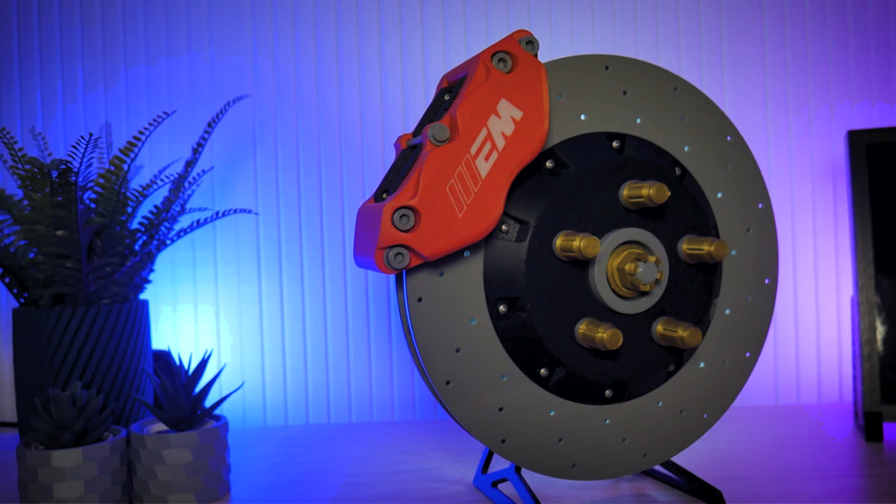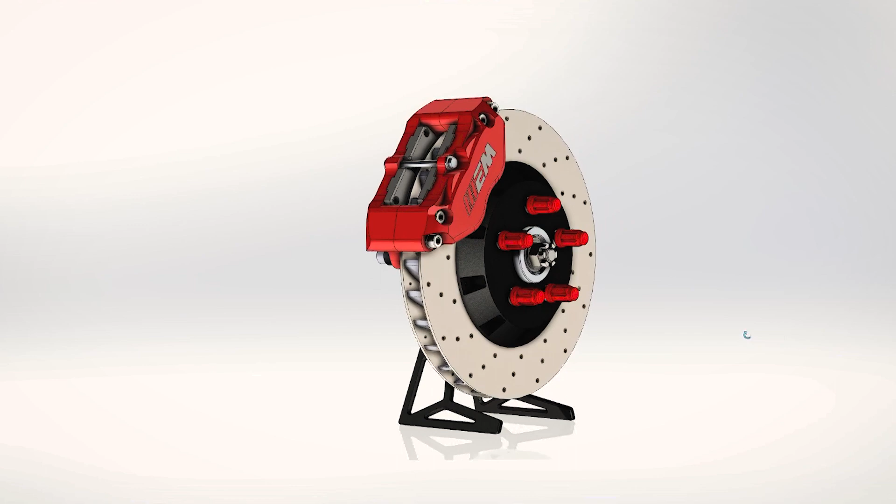In my recent review video of the Anycubic Kobra S1, I featured this 1:1 scale model of a car brake rotor, caliper, and bearing hub assembly. Some people showed interest in getting the files and building one themselves, so I wanted to make this video to explain each of the parts and how everything goes together, plus the few non-3D printed parts you'll need, and optionally 2 pieces you could laser cut instead of 3D print. So let's get into it.

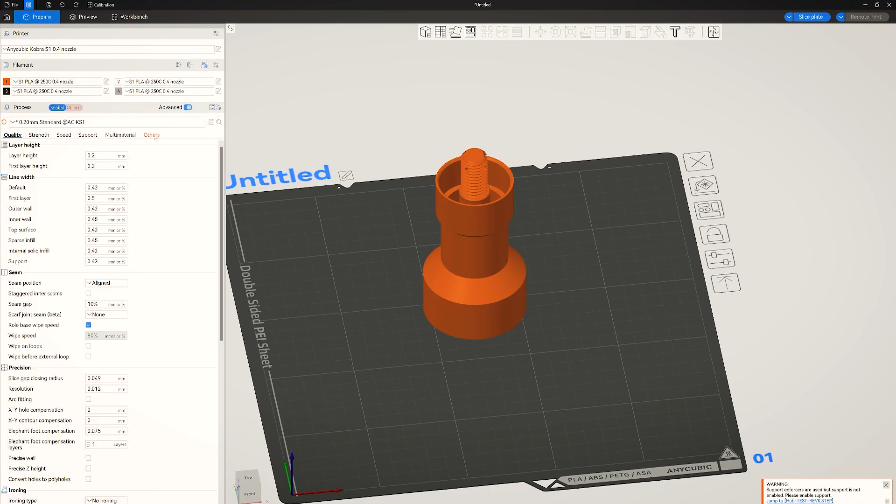This model features actual wheel bearings from a real car. In the 3D printing file list, I'm going to include 2 parts: one is a tube or sleeve that represents the inner housing of the wheel hub bearing carrier, and the other is a spindle test piece. You may need to print these first out of all the other parts because of how these 2 will fit together with the bearings.

As most of us know by now, all 3D printers do not print exactly the same. Tolerances have gotten better over the years, but your printer may still print slightly big or slightly small, and we need these bearings to fit properly.

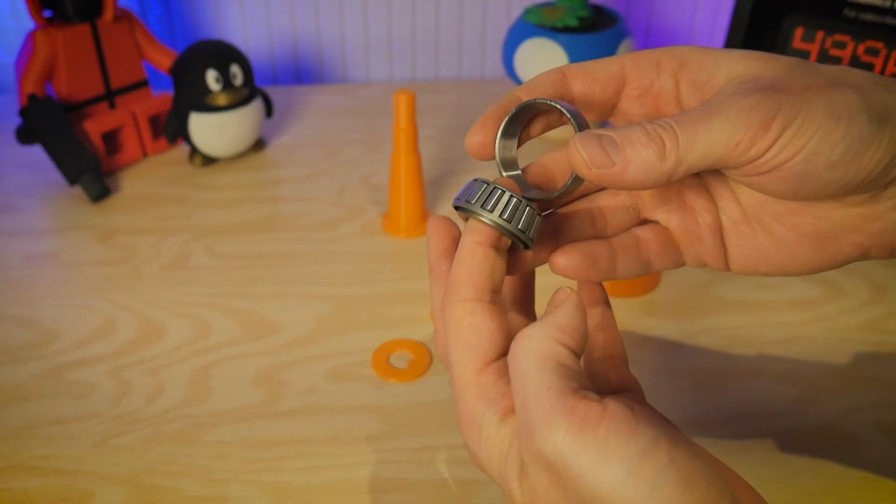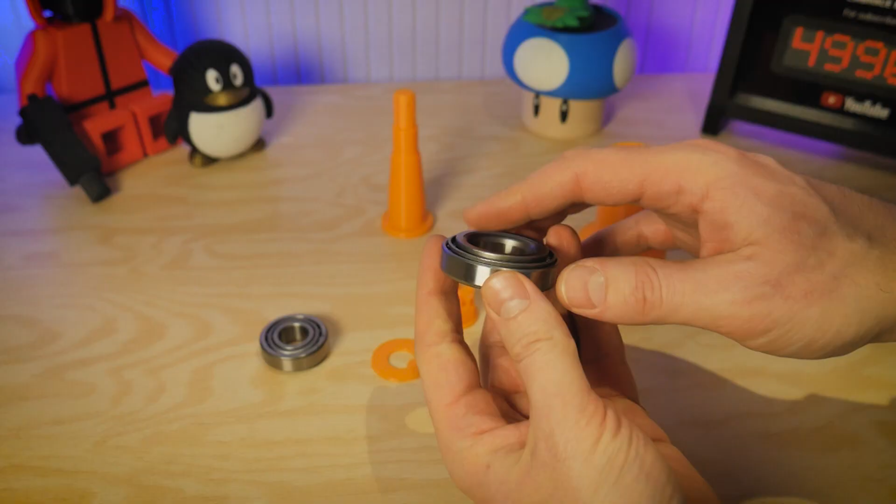The tapered roller bearings feature an inner cone and an outer cup. The larger bearing is the inner wheel bearing, and the smaller bearing is the outer wheel bearing. Both of these will fit into the wheel hub, and for now it's going to be this little test piece here, which represents the inside of the actual hub.

The inner wheel bearing will fit in from the back side of the wheel hub, the larger side, like this. First you'll slip the cup inside, then slip the cone inside. The cup should be a light press fit inside—you don't want a sloppy fit.

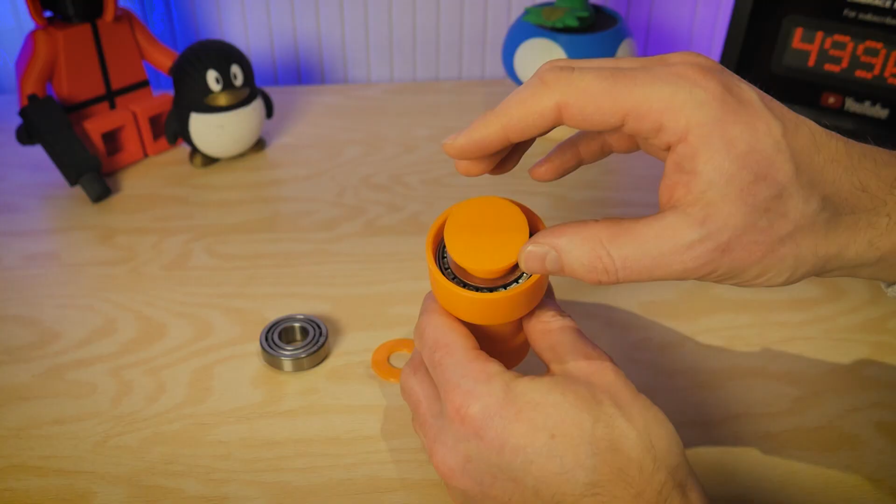Ideally, you want it to press in lightly. Then you can slide the spindle in, and it should also press in lightly as well. Again, you don't want a sloppy fit here, and you shouldn't have to ram it in too hard.

Then we can flip over to the other side, and this is going to be the outer wheel bearing. In the same way, we'll press the cup in first, then place the cone over the spindle that's sticking out, and press it into the cup.

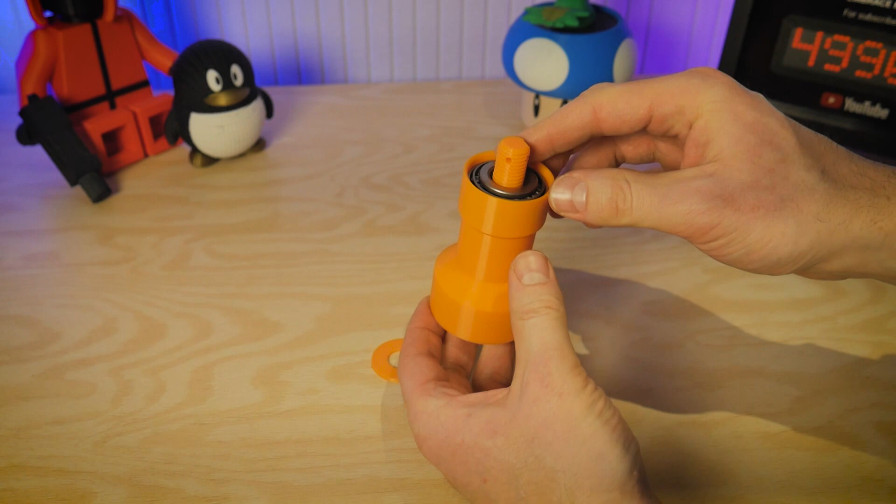After that, we can place our flat spindle washer on top, and then our M16 castle nut. You only need to finger tighten the castle nut, as anything more than that and you'll begin to add bearing preload, essentially forcing the cone into the cup. At some point, too much preload will prevent the bearings from spinning at all.

If you're not getting a good bearing fit, you may have to consider scaling these pieces slightly, but the idea is you're printing test pieces before committing to printing the large pieces.

I already confirmed the fit of all the 3D printed threads in this project on both the Anycubic Kobra S1 as well as several other Creality machines. But similar to the pieces that hold the bearings, you may want to consider printing a couple of the threaded pieces on their own to make sure your printer is capable of printing the threads properly.

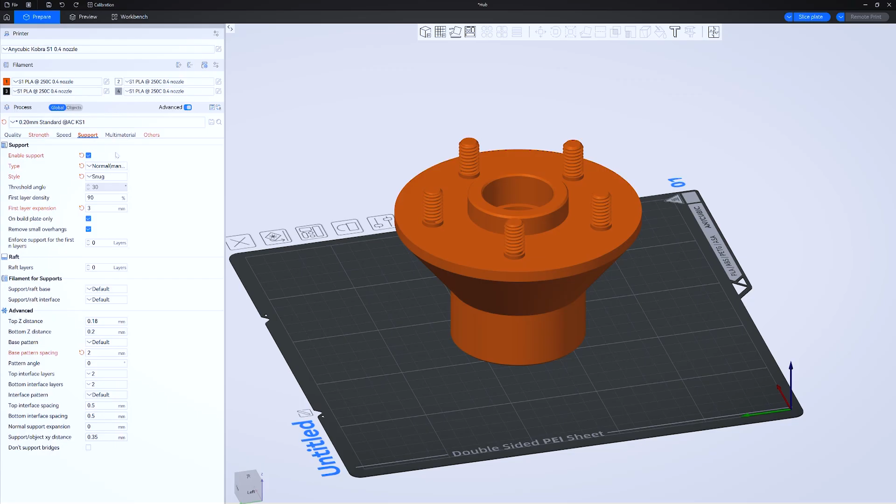One of the larger pieces of this build is the wheel bearing hub, and it's going to be printed in this orientation here. This part will carry most of the weight of the rotor assembly, so you may want to consider printing it with at least 3 walls.

The other detail that should be present if you download my 3MF files is that underneath the hub there is one surface that does need to be supported, which I've already painted on. This is the shoulder that the inner wheel bearing will interface with, so this surface needs to be nice and flat.

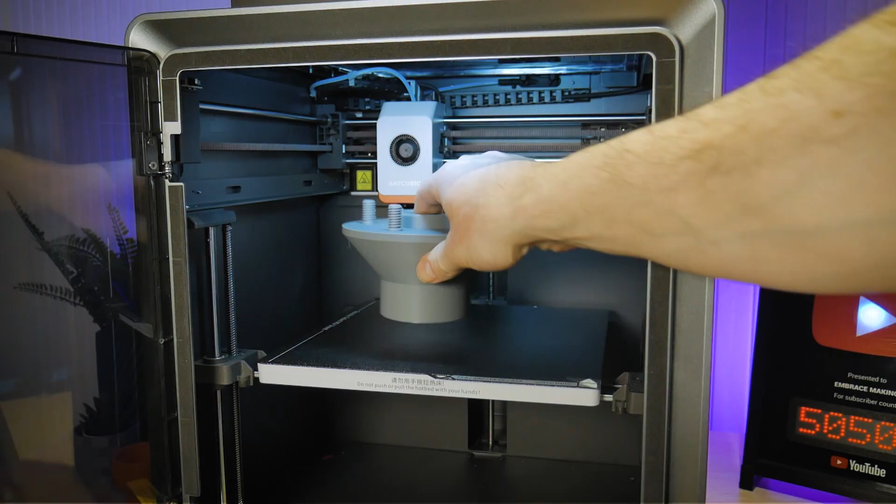You can also see at the top of the part I've integrated 5 M12 threads, and these will also need a little bit of strength. So you may want to add a height range modifier to your part and increase the infill density towards the top around those threads.

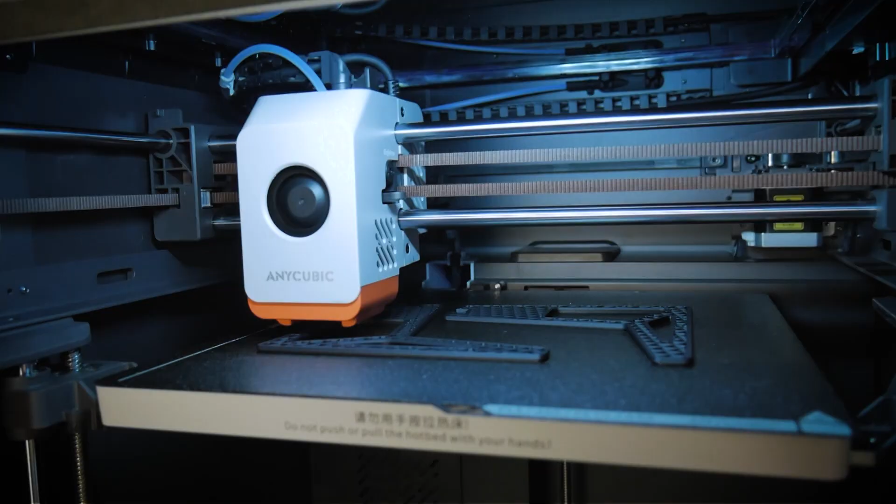At the bottom of the model we have these black legs, and they're basically just stand legs for the entire assembly. They're very easy prints and will just lay flat on your print bed. The only thing here is that they're supporting the weight of the whole assembly, so I printed these with 4 walls and about 25% infill density.

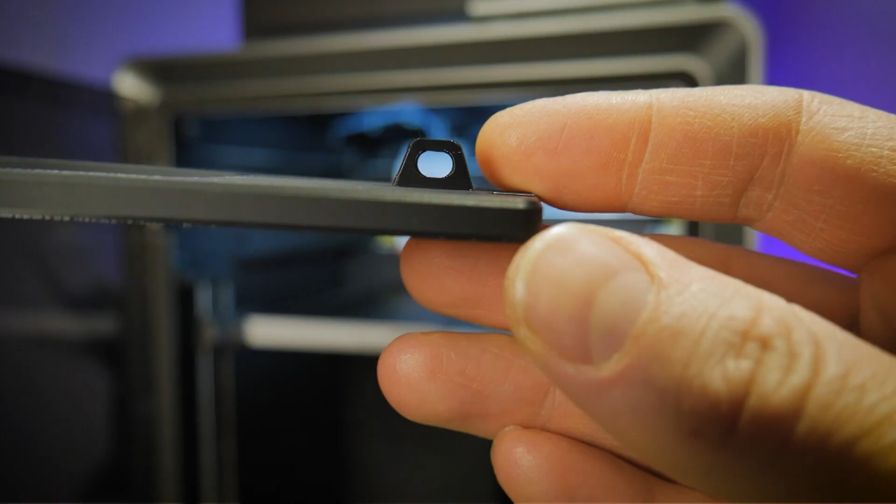Otherwise there's no special requirements here, and the pieces are marked left and right. The left side will be the one on your left hand side when facing the model from the front.

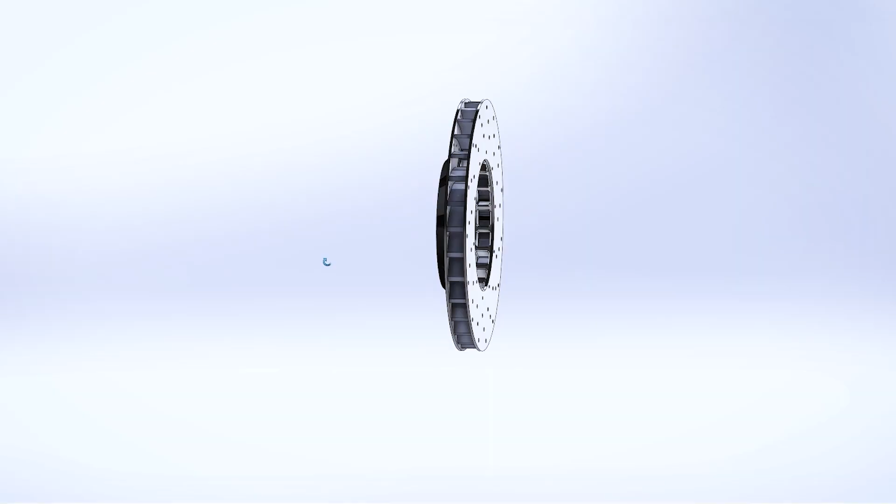Next we can take a look at some of the pieces that make up the brake rotor. This is intended to look like a 2-piece rotor, but because it's 3D printed, I had to separate it into many more than just 2 pieces. I also did my best to make the parts fit on smaller printers like the Ender 3, but you may also have to split some of these models if you're having a hard time.

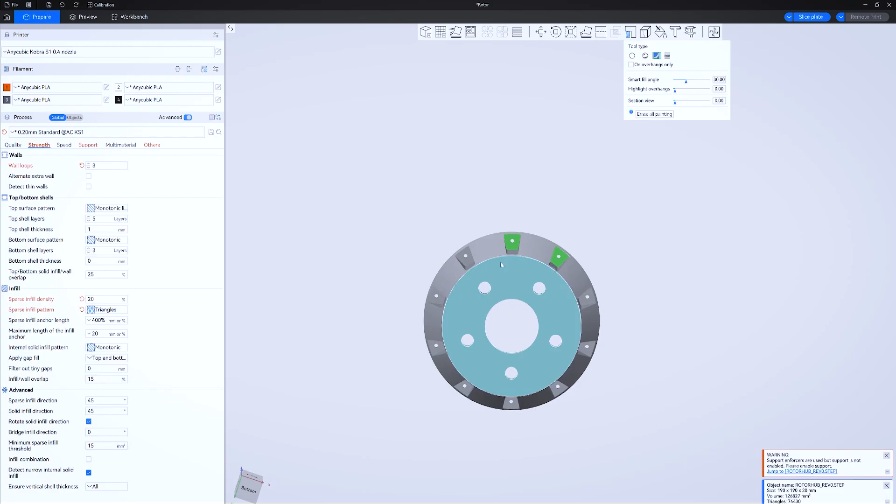The rotor hub can be printed face down, and you'll notice some surfaces will need support. I'd recommend using the support painting tool, and make sure your support interface layer is dense enough that those surfaces print nicely, because you can see some of it on the final model. On mine, the supports printed okay and came off easy enough, but I did have to clean up those surfaces with a razor blade.

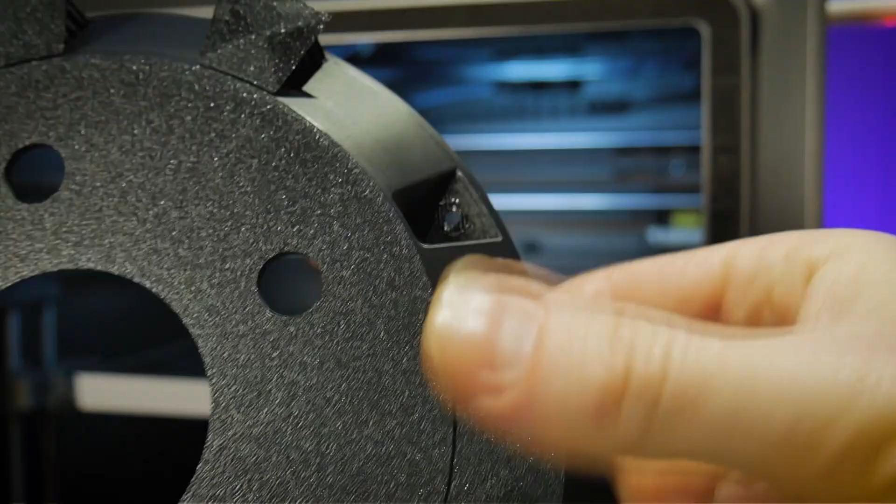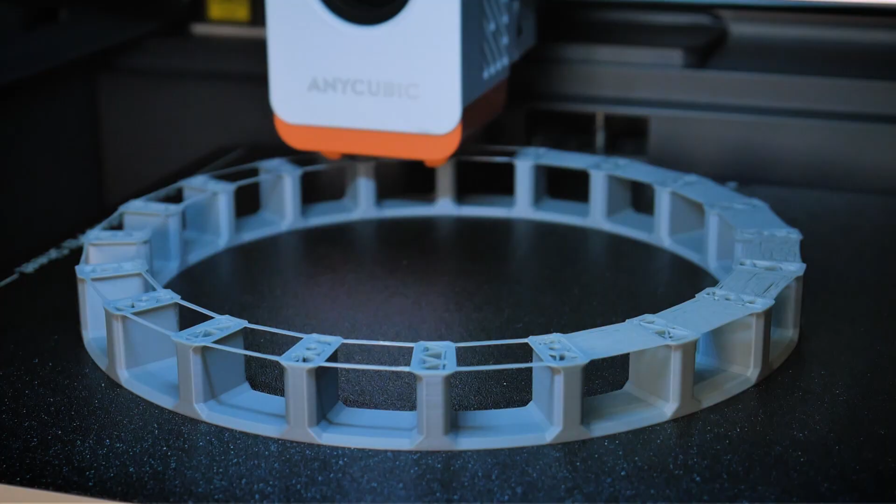The next part is the rotor inner ring, and the only thing special about this part is that it features many bridges. I was able to successfully print this part without any support on the Anycubic Cobra S1, but if your printer struggles to print bridges cleanly, I'd recommend adding some support.

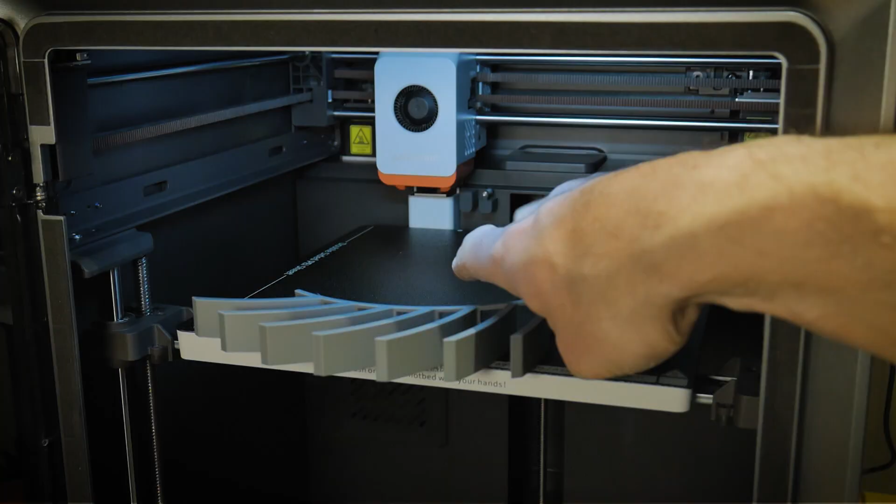The rotor cooling fins are next, and I had to split these into 2 individual bodies in order to get them to fit diagonally on the Anycubic Cobra S1. These should also fit the same way on a Bambu Lab machine, essentially anything in the 250 by 250 build area range. Anything smaller than that, and you may have to break those parts up further.

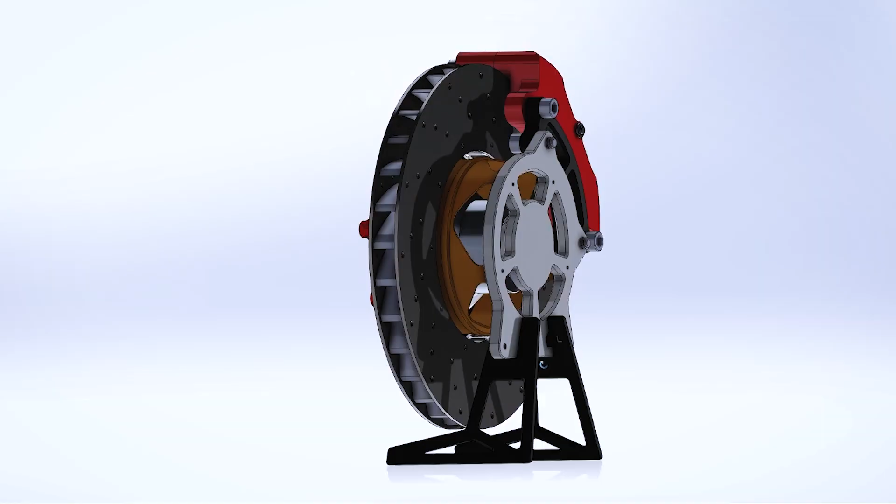The next part to print is the spindle, and looking at the back of the model, you can see it's also integral to how the entire model is supported. So you'll definitely want to go with a minimum of 3 walls and potentially 20% or so infill.

Also, you should have already printed the spindle and hub test pieces, so you should have some idea of how much you'll need to scale this model up or down. Hopefully it won't be anything at all, but it should really be less than 1% either up or down. Otherwise, you risk impacting how all the other parts interface with the spindle, especially that thread.

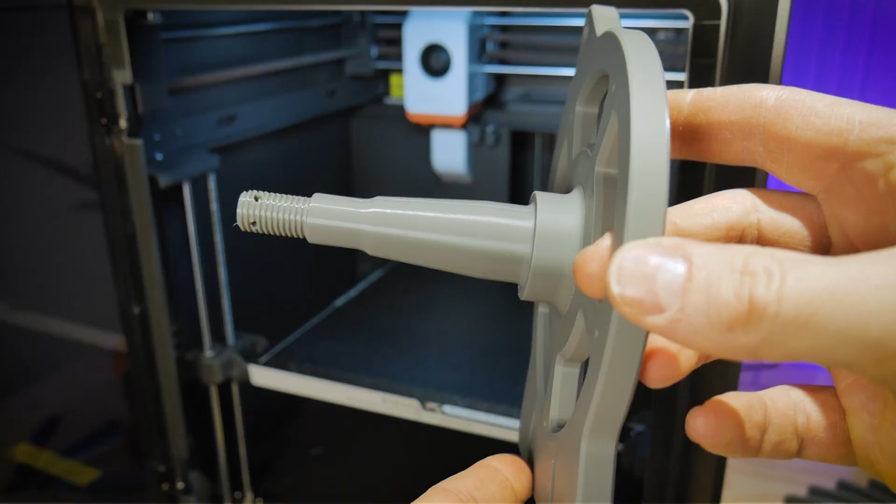The bearing surface on the spindle should also have printed clean. Now you can use aligned seams or a random seam, but the reason I like to use an aligned seam is that if my bearing fit is too tight, I can usually easily locate the seam and just shave it down a little with a razor blade. That's a lot easier to do than scaling the model.

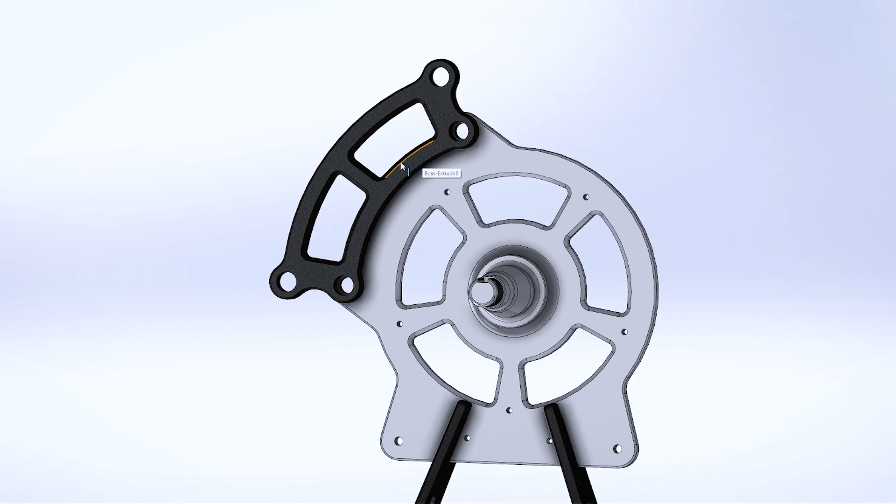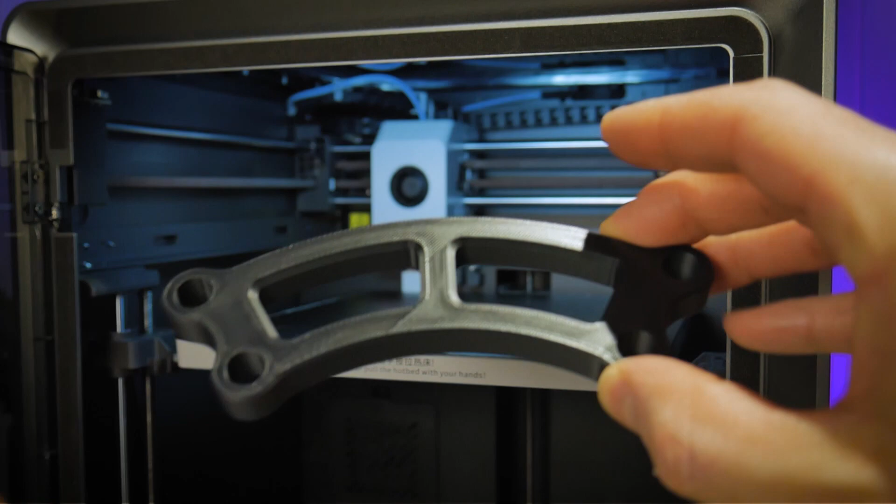The next thing attached to the spindle is this brake bracket. This bracket exists because I didn't want to make the spindle body itself any larger, as it may not have fit on smaller machines. This is also a very simple part, and there's nothing special about it.

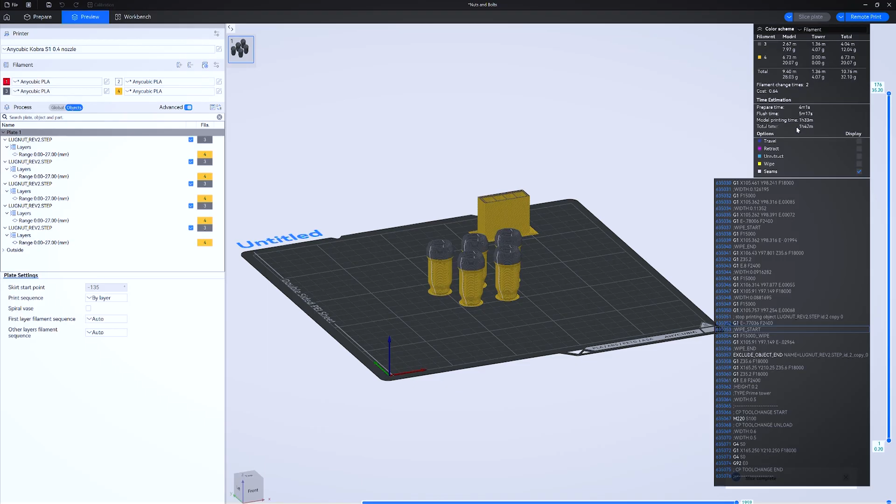Now we can get into some of the parts you can optionally print in multicolor. One of those is the lug nuts, and the only reason I printed these in more than one color was because at the time I was testing the Kobra S1 combo, and I thought these parts would be a good demonstration for multicolor printing, and would add a little flair. It was also a good demonstration to show that when using multicolor printing, if you print more than one model at the same time, you save a lot of time as well as filament waste. So it's really up to you if you want to print these in more than one color.

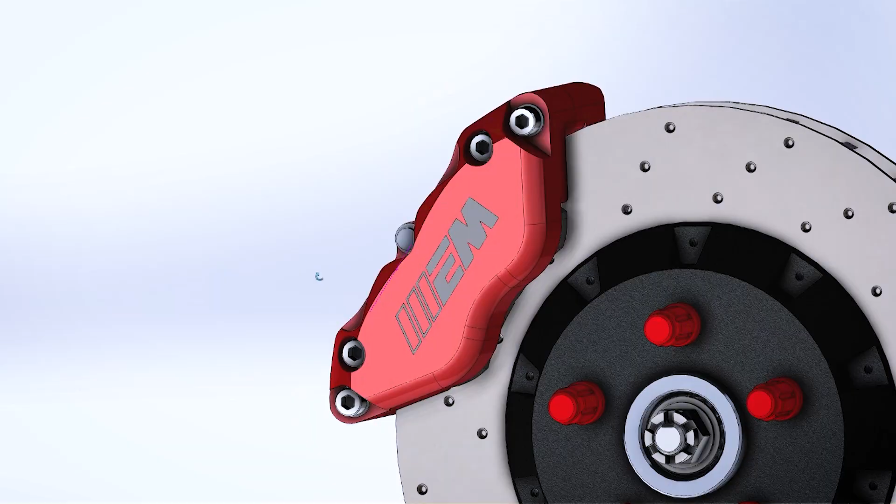Back in the 3D model, you'll also notice that the front half of the brake caliper has a logo on it, and this is another part we can optionally print with a multicolor machine. Now, regardless of whether or not you can print in more than one color, I'd recommend importing this part into your slicer using the 3MF file provided.

This way, the several bodies that make up this half of the caliper will be imported such that they're all in the correct position, and they will come pre-colored. Then you can just change the printer and print profile to whatever suits your machine, and you can hide the individual bodies that make up the logo if you don't want to print them in another color, and you're fine with the logo just cut into your part.

You may also have noticed that this front half of the caliper will require some supports. Make sure you have your support settings dialed in because these supported surfaces will be highly visible on the front of the model when it's finished.

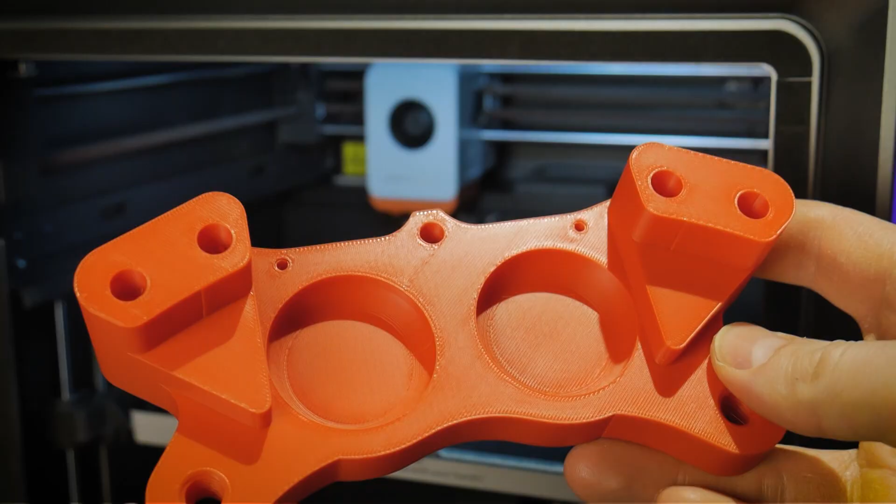The back half of the caliper is only a single body part and it can be printed face down. It's intended to be a single color part, does not require any supports, and the only thing you've got to watch out for is that there are some internal threads built into this part.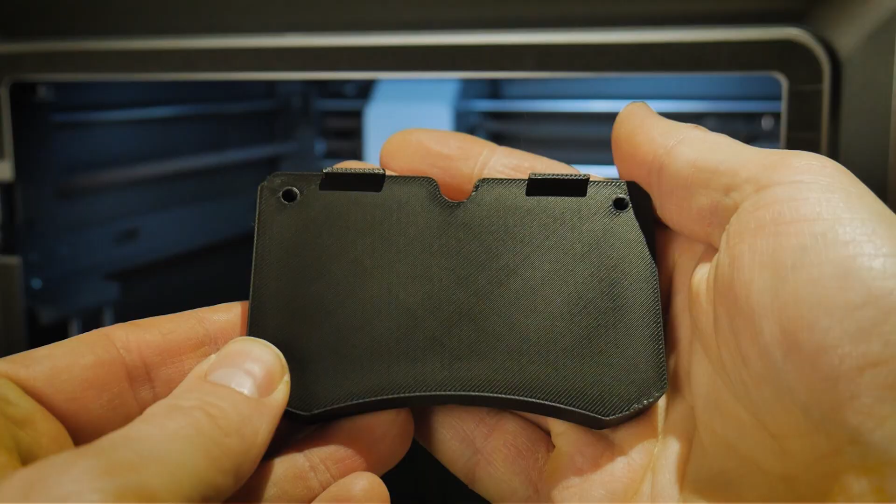The brake pads are the next part of the caliper assembly. You'll need 2 of them. They're both identical, and the only thing here is that you'll need to add some support to the counterbore holes.

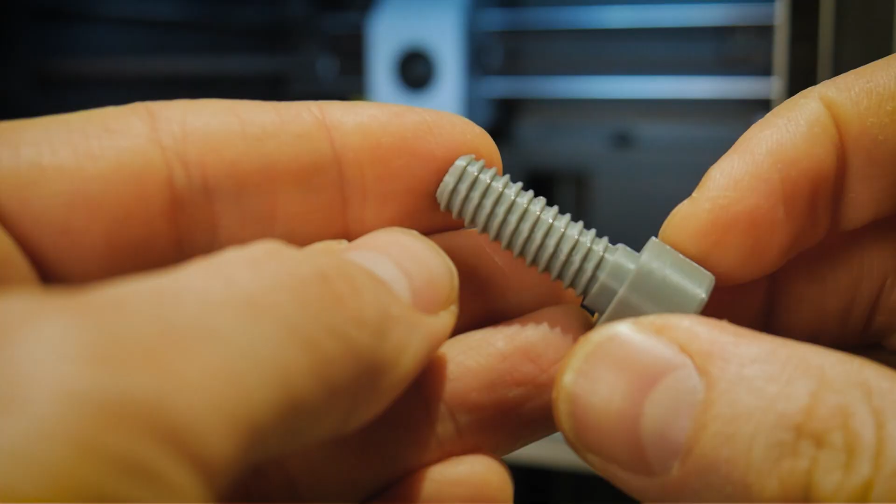The caliper related hardware will be in a separate file, and there's going to be 4 M10 socket head cap screws as well as 4 M8 socket head cap screws. There will also be 4 M8 washers. Do a good job inspecting these parts after they're finished and clean up the threads if you have to.

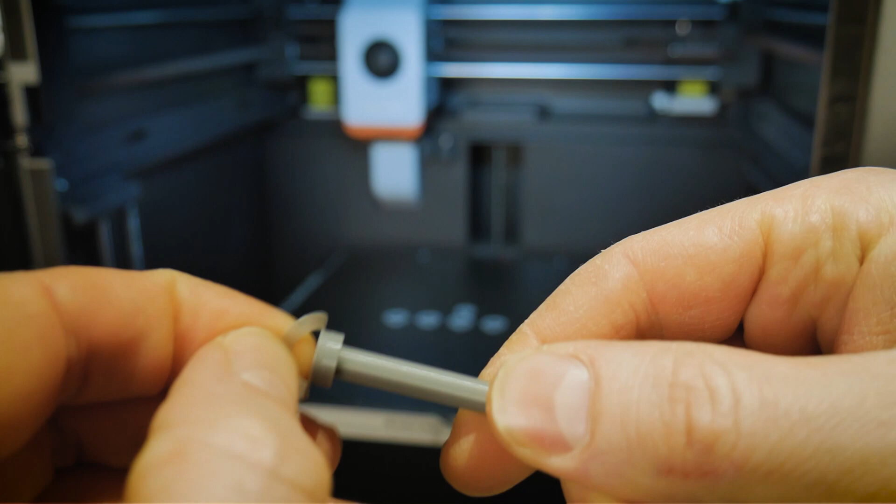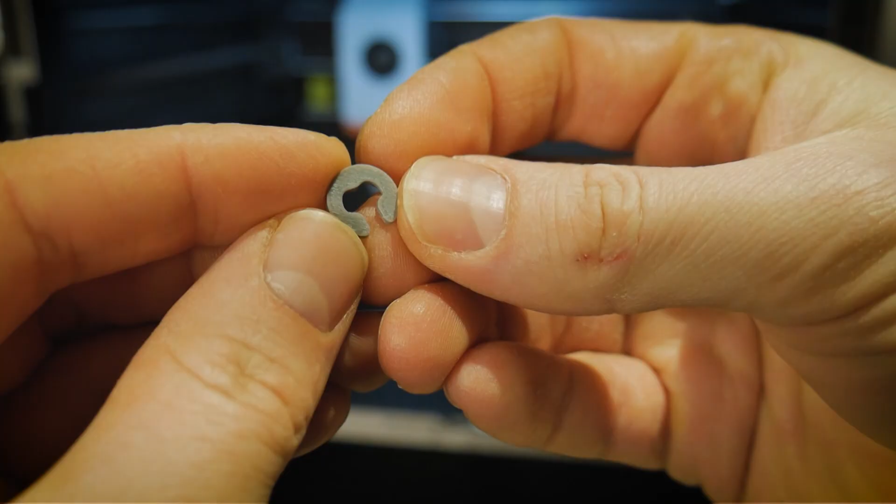There's one other piece of hardware on the caliper, and it's this retaining pin. It gets printed upright, so it could be easy to knock over because it does have a small surface area on the bottom, so you may want to consider adding a brim to this part. This retaining pin will lock into place on the model with this C-clip. You should be able to get it to pretty easily snap into place in the groove on the retaining pin. We'll fit this to the caliper later in the video.

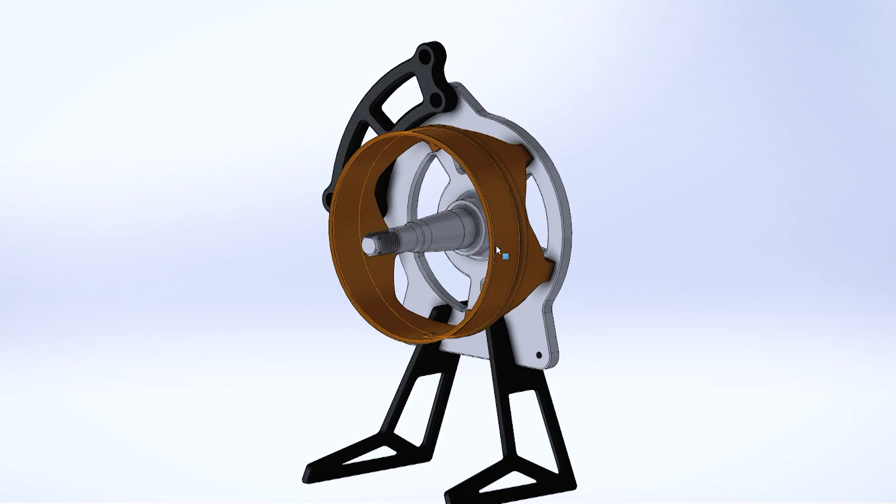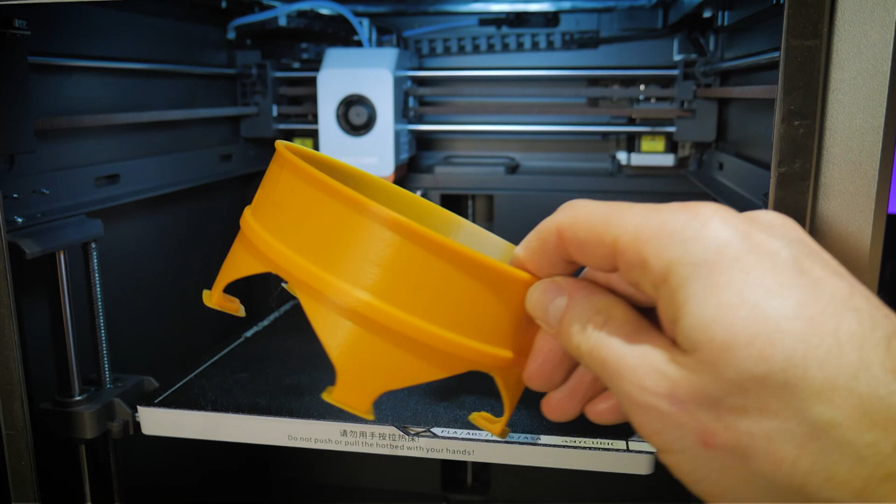One optional piece is this LED holder. In an attempt to make this model more interesting while it's sitting on the table, I decided I was going to add an LED strip to the inside of the model and see if I could get it to shine through some of the holes as well as the cooling fins of the rotor. If you have no interest in trying to light up your model, then you will not need to print this part.

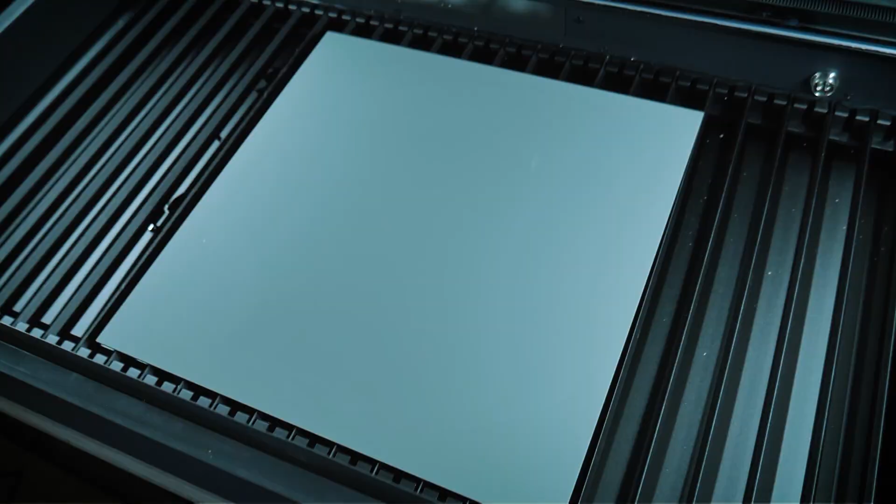The final 2 parts that we need to discuss are the brake rotor surfaces. I left these for last because I personally cut these out of acrylic using one of my laser cutters. Now, if you have the tools to do this, this is going to look the best because each of those rotors will come out as one continuous piece. Now, if you don't have a laser cutter, I've also split these parts up into several pieces so that you can print them on your 3D printer.

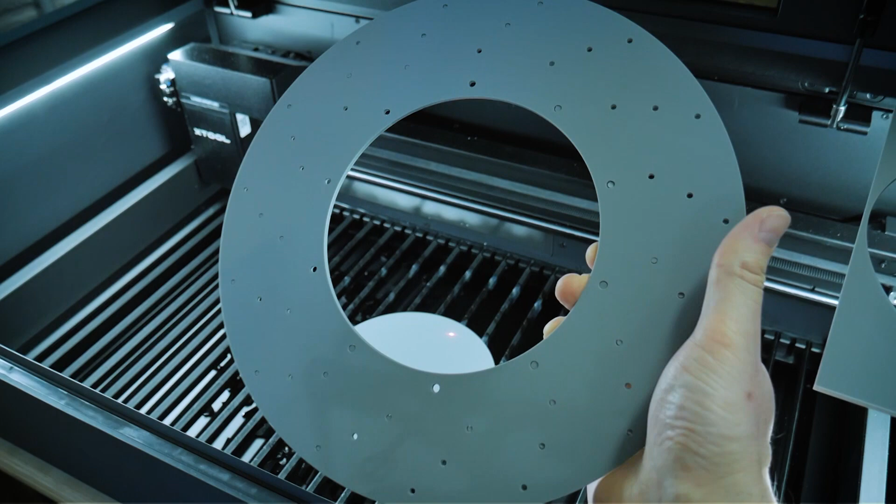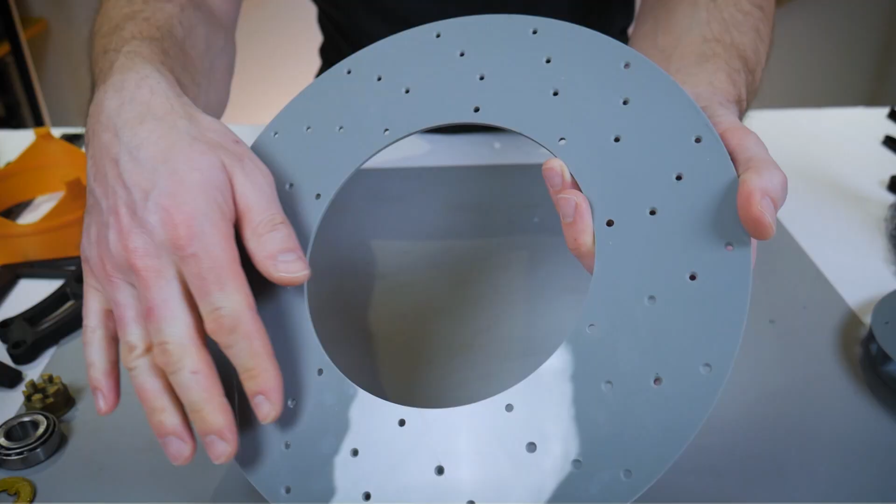That being said, if you also have a printer that is capable of printing at least 300 by 300, then you can print these rotor surfaces in one shot. Now in my case, because I did go with the acrylic rotor surfaces, I also countersunk the holes to make them look more realistic. This is an optional step, but I do think it looks really good.

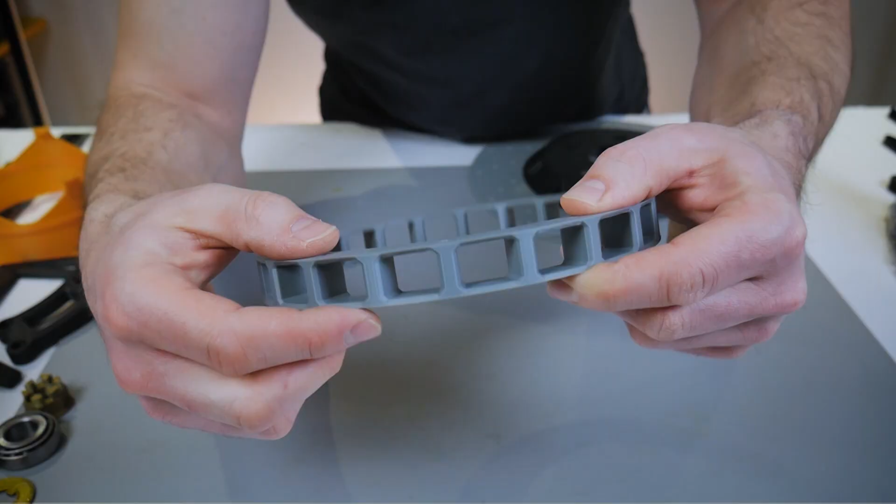Now looking at the assembly, the first thing we can do is attach our rotor hub to the front rotor surface. To do that, we're also going to need to bring in the inner ring of the rotor because this is where we have all of the holes that our screws will fit into. The hole spacing on the front and the back is the same, and they're just staggered so the holes don't run into one another. The front rotor surface is going to get sandwiched between these two parts, so I'll put that in the middle.

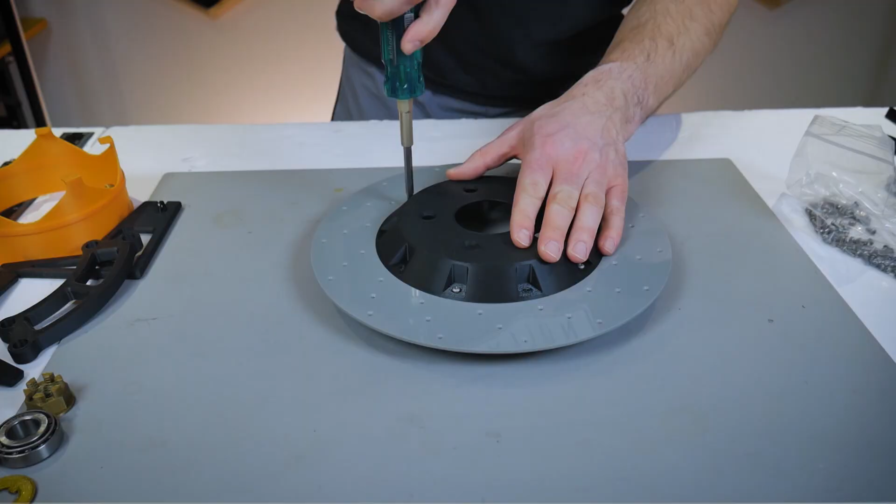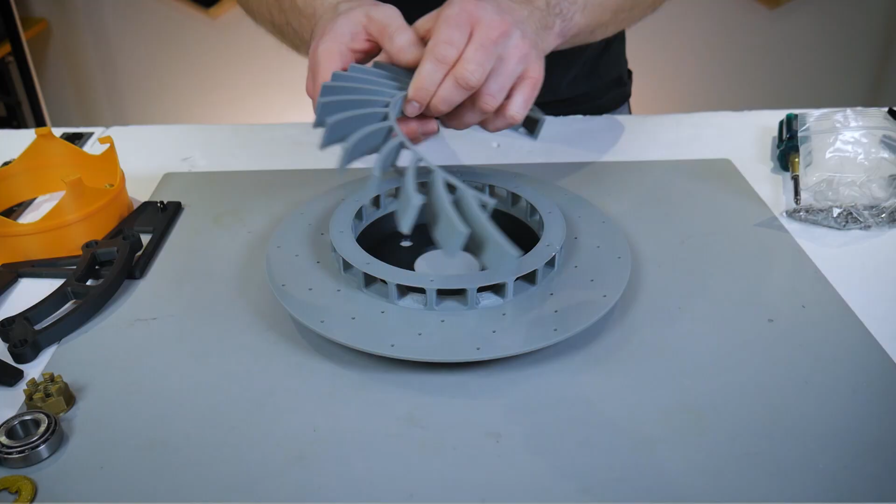We're going to be using these M4x10 thread forming screws for the entire build. This is the only piece of hardware that you're going to need. Those screws will pass through the front rotor hub, the front rotor surface, and then they'll thread into that inner ring. I'll put a link to these screws down in the video description below because they are thread forming screws, so they will cut their own threads and you won't need to tap any holes.

Next, we'll bring in the rotor cooling fins, and you'll want to align them such that the holes in the rotor surface get spaced between those fins.

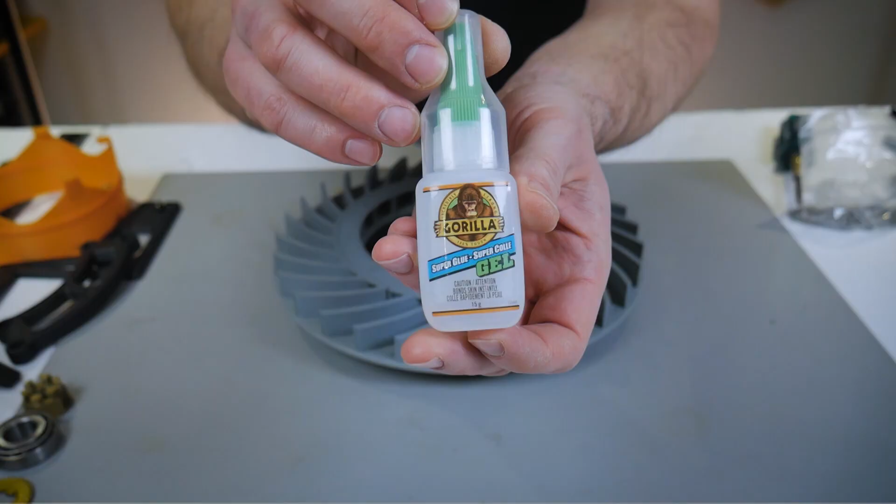If you want to add some kind of alignment mark with a permanent marker, you can do that. Nobody's going to see the inside of this, but we are going to be attaching these now with some super glue. I applied this glue to the outer face of the inner ring, as well as the surface of the rotor, and then I've stuck those cooling fins on with the glue, and then added more glue to the top of those cooling fins, and then placed the rear brake rotor surface on top and used more of those M4x10 thread forming screws to secure this piece down to the inner ring. Now you can see our rotor is complete.

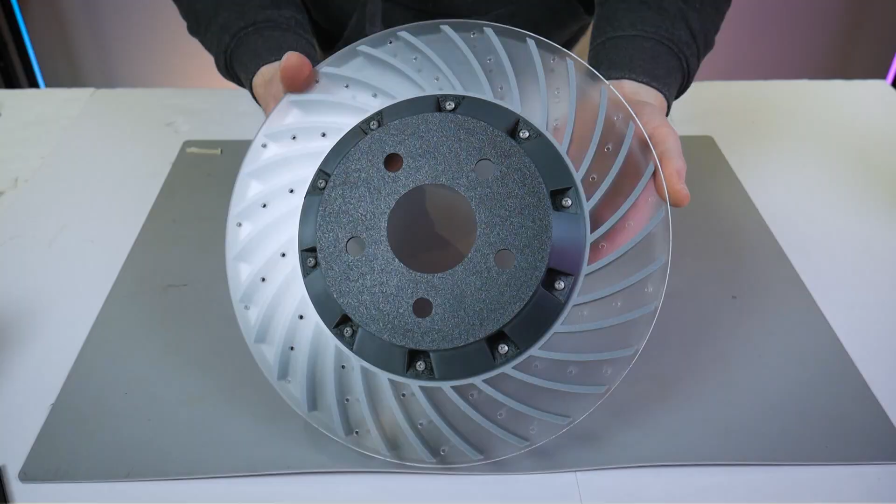In a moment, I'm going to add some optional LEDs to this project. So I went ahead and made a second rotor, and this time for the rotor surfaces, I used some clear acrylic. I think it's going to look really great with some LEDs shining through. However, I'm not sure how I feel about being able to see the rotor cooling fins on the inside. If I were to do it again, I'd probably use some material that's more heavily frosted.

Next, I'll mount the optional LED holder ring to the spindle. You can see at the bottom of the ring, there is a hole for the LEDs to pass through, and we're going to align that with the bottom of the spindle. I'll put links in the video description down below to the two different styles of LEDs that I used. This one here is the COB style, and you'll also see later that I used some RGBs.

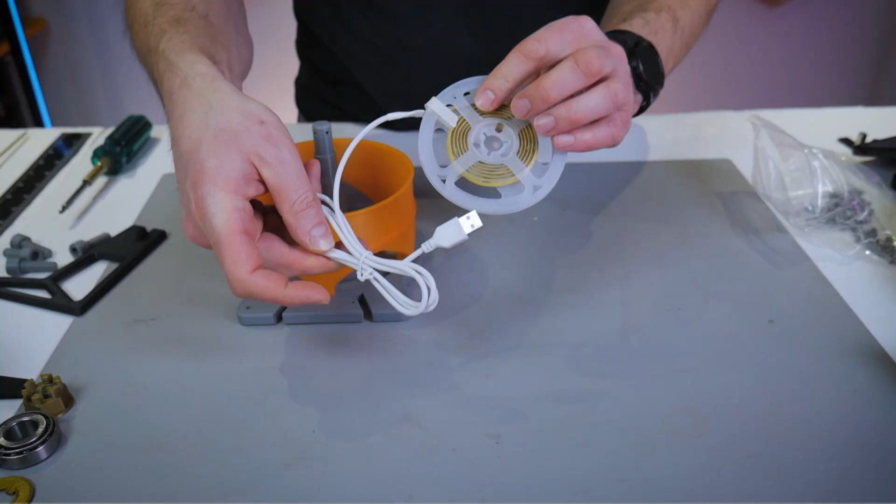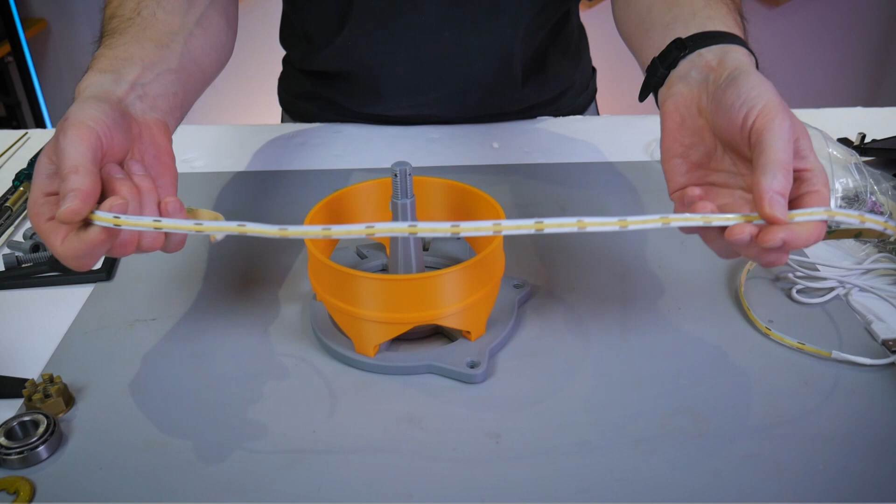The LED mounting ring will get attached to the spindle using 5 more of those M4x10 thread forming screws. It should look something like this when you're done, and now we can start to thread our LEDs through that hole in the bottom. You can see here how I've taken my strip of LEDs and how I've threaded it through that hole, and I've taken the power cord and power switch and put it through the back of the spindle.

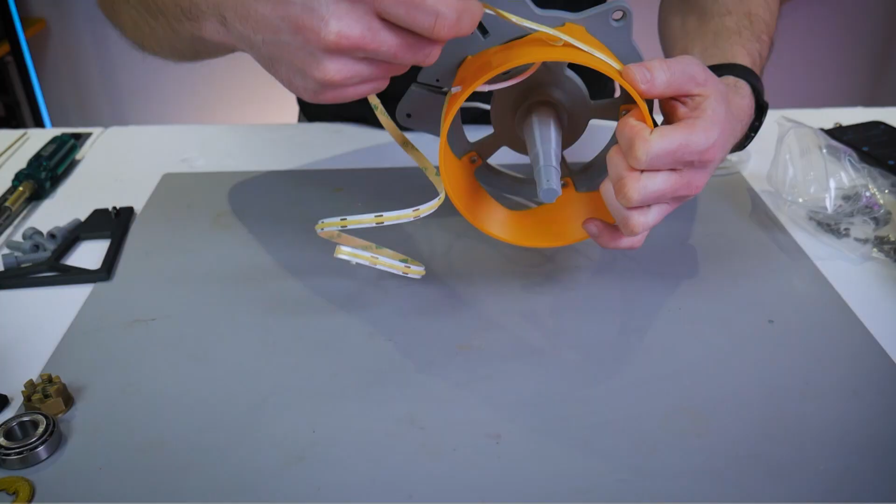Now I can use the adhesive backing of the LEDs and begin to wrap it around the LED mount. This particular LED strip is 2 meters long, and if I wrap it around in a spiral pattern, it goes around almost 3 times. This is what it should look like when you're done with the power cord exiting through the rear.

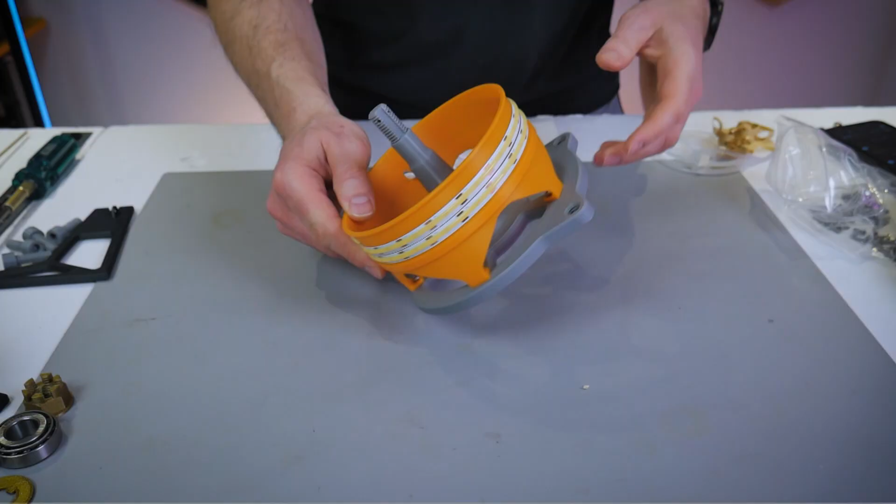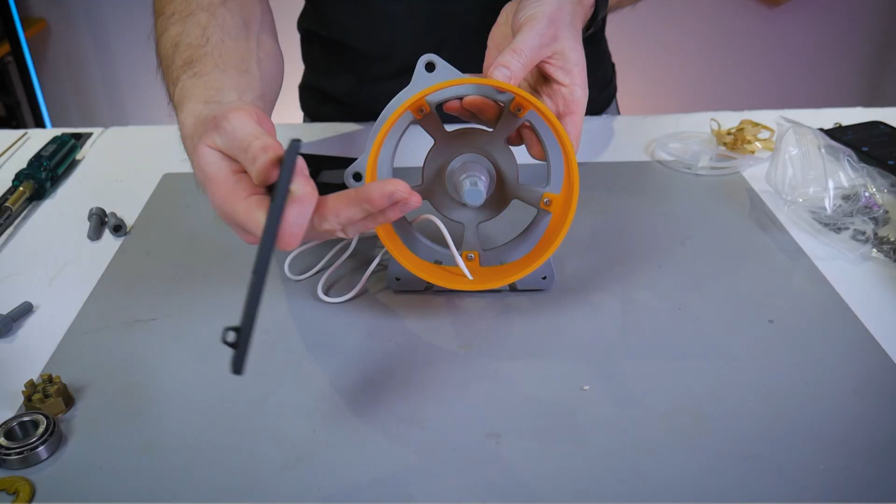Now we can mount our stand legs to the model, and each of these has its own marking, L for left and R for right. The frame of reference for left and right is when you're looking at the model from the front of the spindle. So we'll start with the right hand side leg and we'll just slot that in.

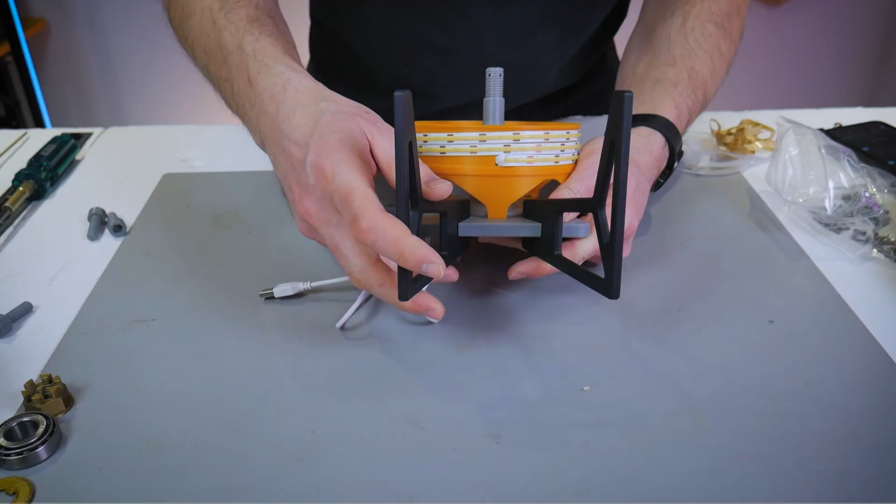You'll notice that the tab should be facing the inside on the back. Then we'll do the left hand side, and again the tab on the back will be facing towards the inside. So it should look something like this. There are holes in there as well where each of those legs will receive another one of those M4x10 thread forming screws so they don't come out. When you're finished with this step, it should look something like this, and the model will stand on its own now.

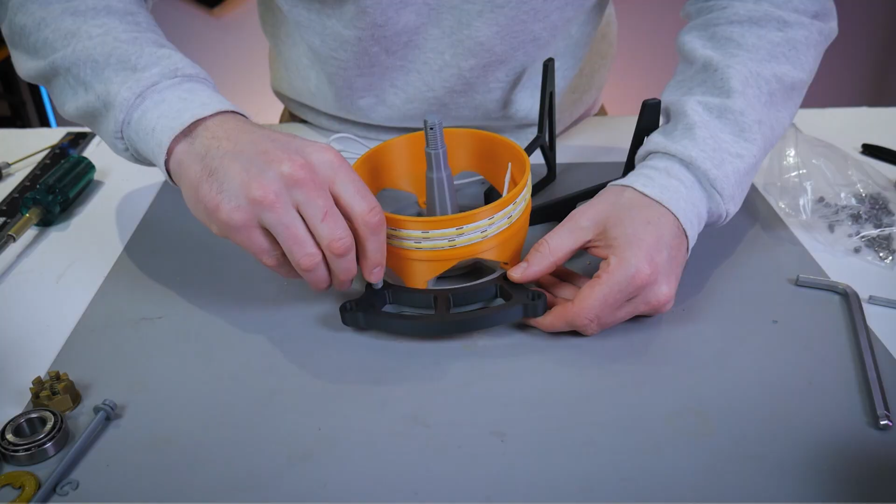Now we can move on to the brake caliper mounting bracket, and this will get attached to the spindle. You'll notice that I'm placing it on the front side of the spindle body, and I'm going to mount it using 2 of these M10 socket head cap screws. If you're using a tool like a hex key to tighten these, do not go overboard tightening them. They're just plastic 3D printed screws. They just need to be snug.

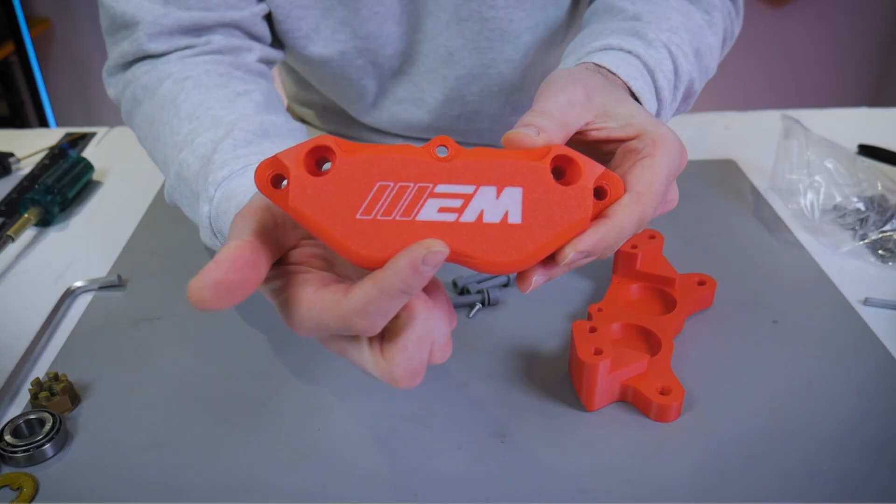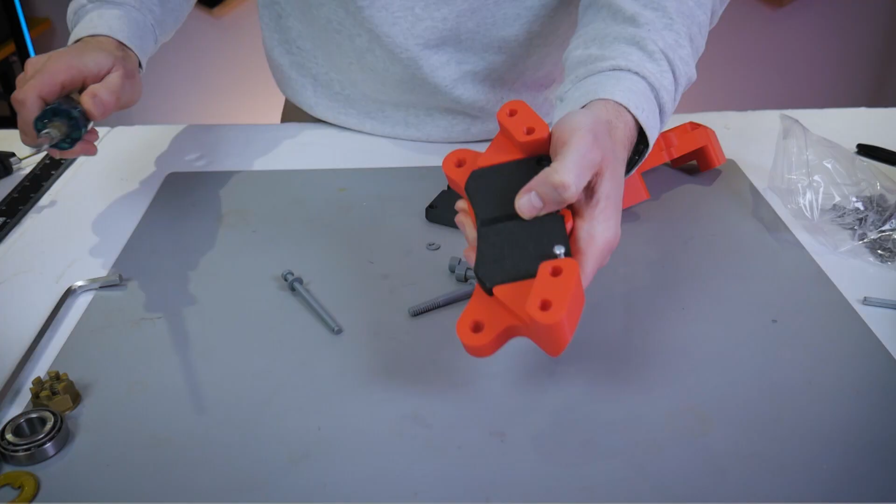After that, we can assemble our brake caliper, and there's again 2 halves which you've printed, as well as 2 brake pads. The pads will go on the inside of the calipers like this, and each pad will get 2 more of those M4x10 thread forming screws. It should be pretty clear that those 2 screws will go into the counterbore holes in the brake pad. We can repeat the exact same process for the other half of the caliper, and then once we have our 2 halves complete, we can begin to attach them together.

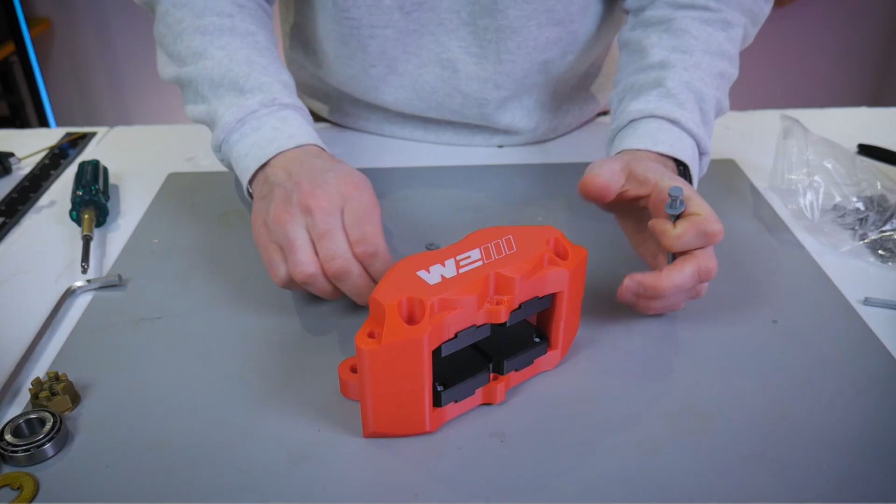The 2 halves of the caliper will get assembled together using these long M8 socket head cap screws, and these are the screws that have those M8 washers.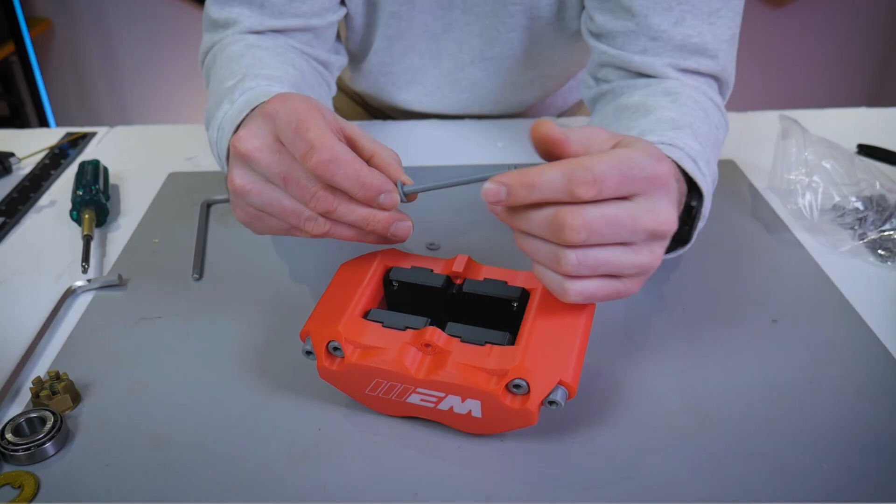You'll place them through the top side of the caliper like this, and again I'll tighten them down using a tool, but they do not need to be over tightened as they're just made of plastic.

Finally, we can insert our brake pad retaining pin. It also has a small washer on one side, and on the rear, this is where we slide in the C-clip, which keeps the pin retained in place so it should not pop out. Your finished caliper should look something like this.

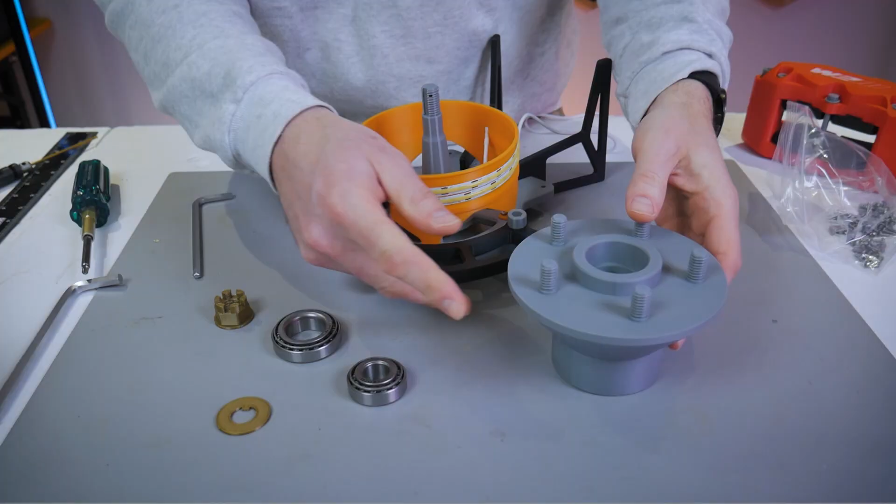Now we're finally ready to move on to the wheel bearing hub, and we've got to get those bearings in place before we can place it on the spindle. Earlier in the video, I explained how these bearings work and the configuration inside the hub, so if you skipped that, go back and watch. Essentially, we've got an inner cone and an outer cup, and the two fit together.

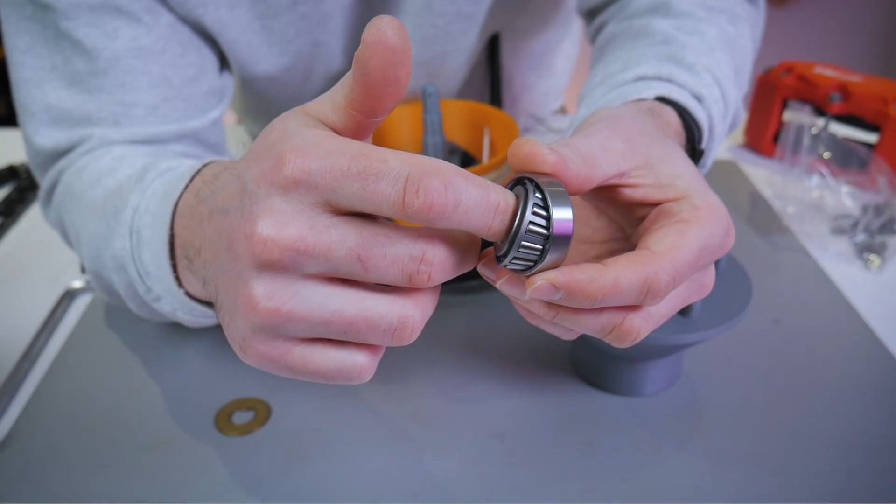I can take the smaller of the two bearings, which is the outer wheel bearing, and press that into the bearing hub, then take the larger tapered roller wheel bearing and press it into the back of the hub. Pay attention to which way the bearing is getting inserted, because the direction does matter.

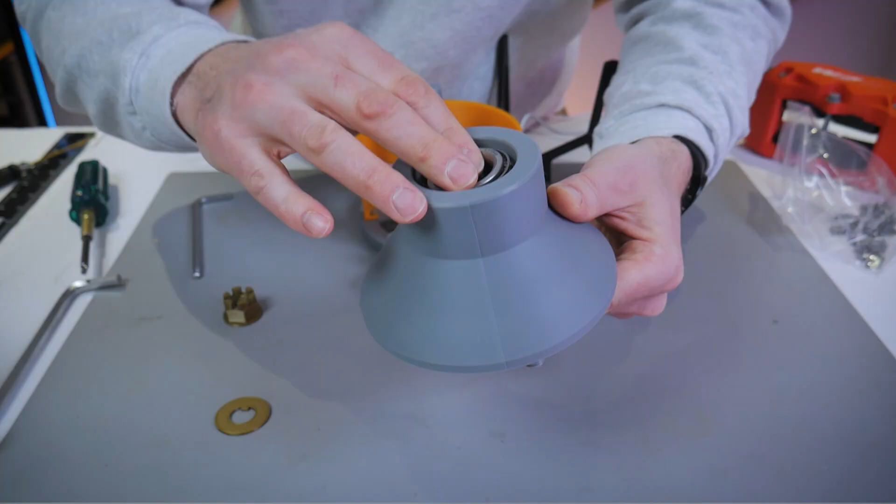Now we can take the entire wheel hub and place it directly on top of the spindle. If everything is aligned properly, the bearings should spin freely.

Now we can take our spindle washer and place it on top, and you'll see there is an indexing feature for this washer, which keeps that washer from spinning against the bearing surface below.

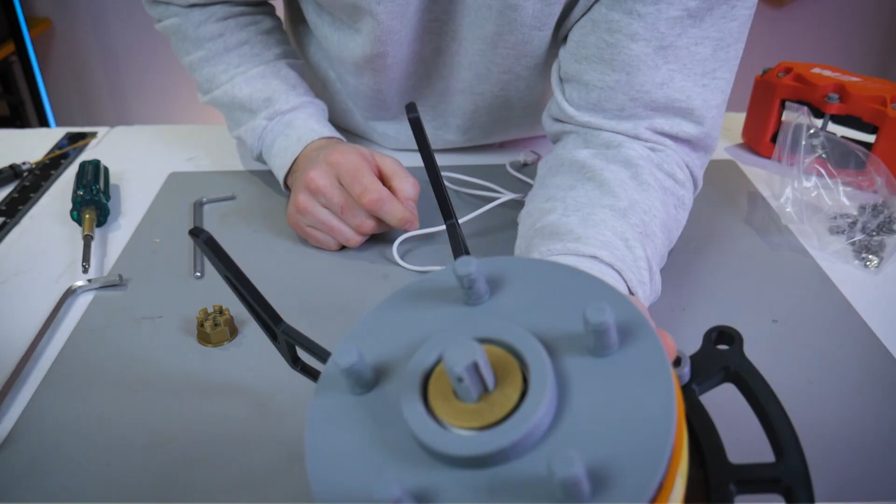Then we can take our M16 castle nut and begin to thread that onto the threads of the spindle. I also explained earlier in the video that if you're not familiar with this kind of assembly, the castle nut is what provides some of the bearing preload. So the more you tighten that nut, the more the bearing cone gets forced into the cup, creating more friction. This really only needs to be finger tight so the bearings can spin freely.

And if you really want to go for the ultimate realism, there are holes in there where you can place a cotter pin if you have some of those on hand.

Now we're ready to grab our rotor and place it onto the hub. Align the 5 holes in the rotor with the 5 wheel studs, and it should slip over top.

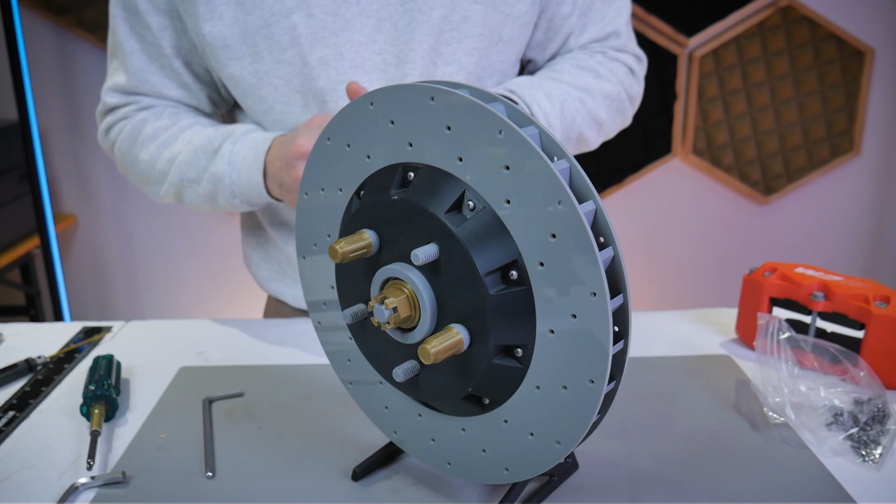Then we can go grab our 5 lug nuts and begin to thread those on to secure the rotor in place. While I'm doing this, just another friendly reminder that these are all plastic nuts and bolts, so do not over tighten them. If you broke one at this stage in the build, it'd probably be pretty frustrating.

With the rotor mounted, you can give it a spin and just make sure it's not wobbling too much. The parts are 3D printed, so it may wobble a little bit, but it's just a display model, so it shouldn't really matter too much.

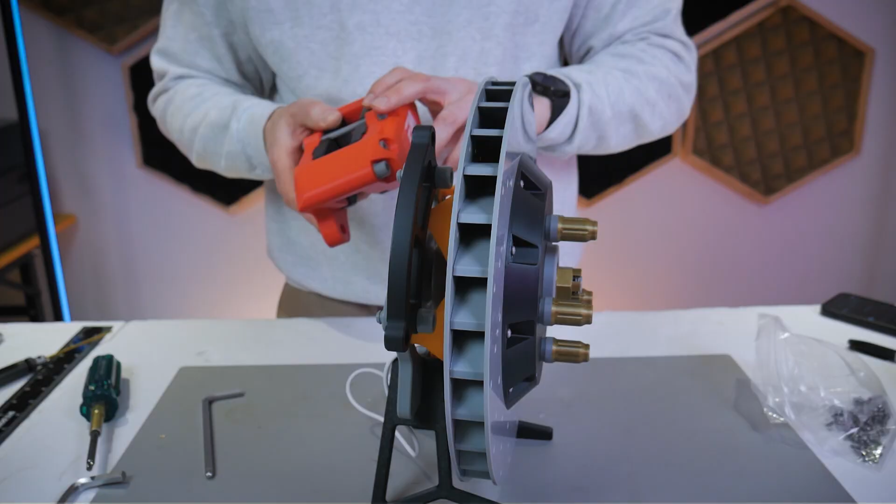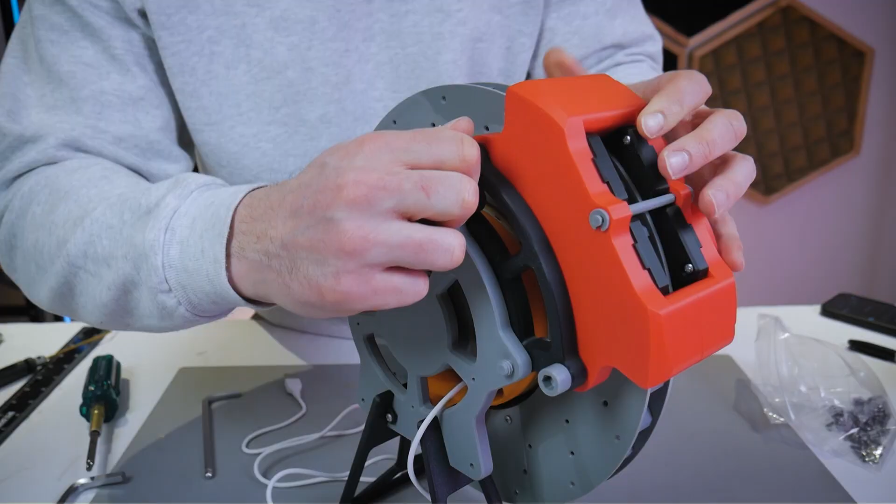Now we can mount our caliper, inserting it over top of the rotor, and these M10 socket head cap screws will get threaded into the back of the caliper through the brake bracket, securing it in place. The rotor should be centered between the 2 brake pads, and it should still spin freely without contacting those pads.

If yours is misaligned, then you may want to shim out the caliper, and you can do that using some thin M10 washers between the caliper and the brake bracket.

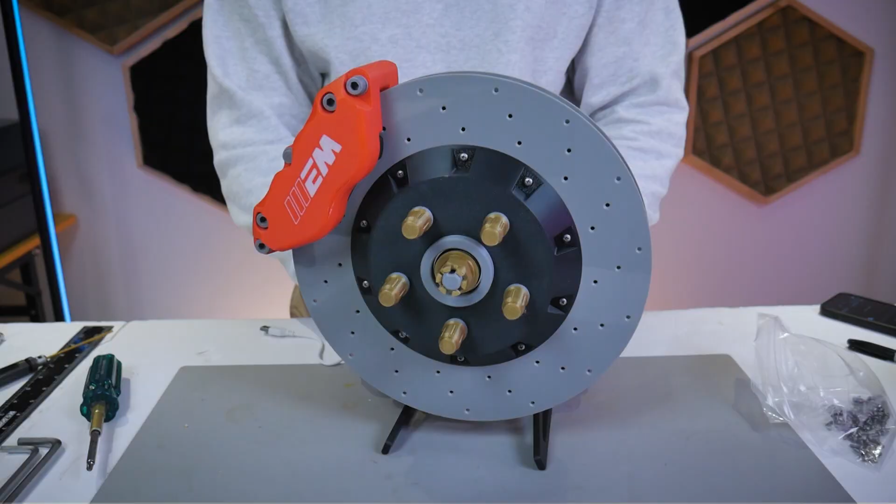So that summarizes the assembly, and you can see that I constructed 2 different rotors, one with gray acrylic and another with some slightly frosted clear acrylic.

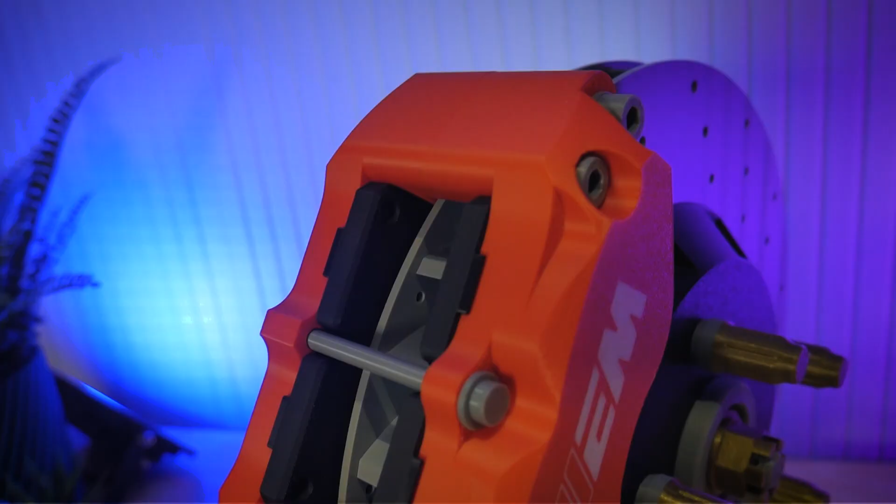With the clear acrylic rotor surfaces, I also switched over to using some RGB LED strips on the inside. The COB LEDs with the opaque rotors did look okay, but transparent rotors clearly made the lighting effect much more obvious.

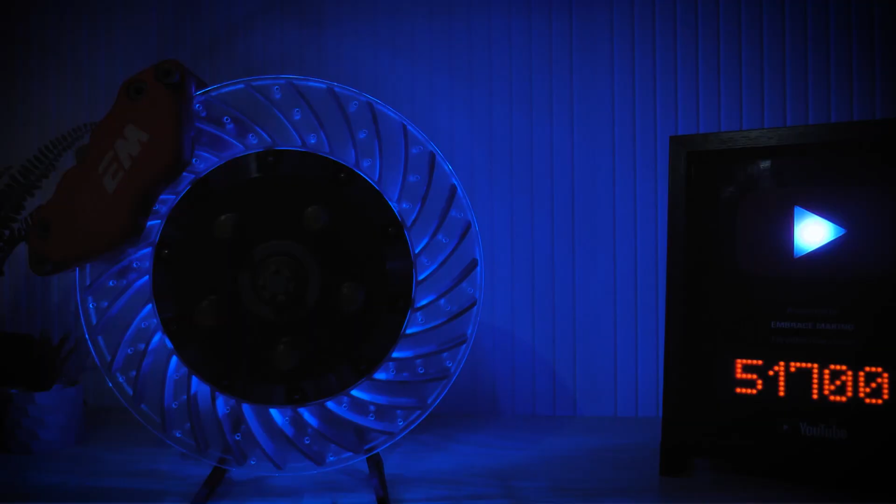If you're 3D printing the rotor surfaces, perhaps you could use some sort of clear PETG or even clear PLA, and you should get a very nice diffused light.